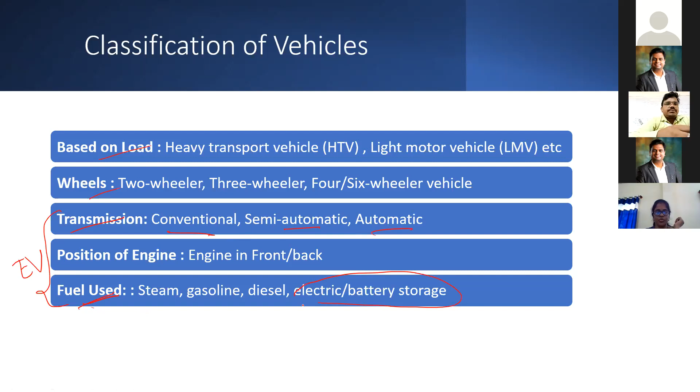These are the two things where your electric vehicles stand apart: one is the transmission, one is the fuel used. For electric vehicles, the transmission will be semi-automatic or automatic. Nowadays gearless vehicles are coming, especially in electric vehicles. And basically the fuel used in electric vehicles is electric power, the battery storage, compared to your ICE vehicles. So these are the very basic classifications of vehicles, I think everyone is very much aware of this.

Now coming to the types of EV and HEV. As I told you, what is hybrid? Hybrid is nothing but putting two sources together, which can be in the form of energy or in the form of propulsion. You can hybridize two things: one in the form of energy source, meaning you can use your fuel plus electricity as an energy source. For propulsion, you can use motors as well as an IC engine. So you can have two kinds of hybridizing.

In the hybrid electric vehicle, since you're using two different things for traction, they can be connected in the form of series, in the form of parallel, or they can be put in a complex form, that is series and parallel combined. Maybe in the later slides, I'll show you the architecture of series, parallel, and series-parallel, so it will be clear.

Then comes the second type, that is the plug-in hybrid electric vehicle. As the name says, here your battery will be charged by an external source, not charged on board. It is using a plug-in, like from sockets, from the sockets of your home, the battery is getting charged.

Then the battery electric vehicle. Here also you charge your battery, you can charge it plug-in or on board also. The propulsion system used here, from now on in the pure battery vehicles, these two are hybrid vehicles. From now on, you can have a single traction motor, that is the single traction propulsion system, which is only a motor.

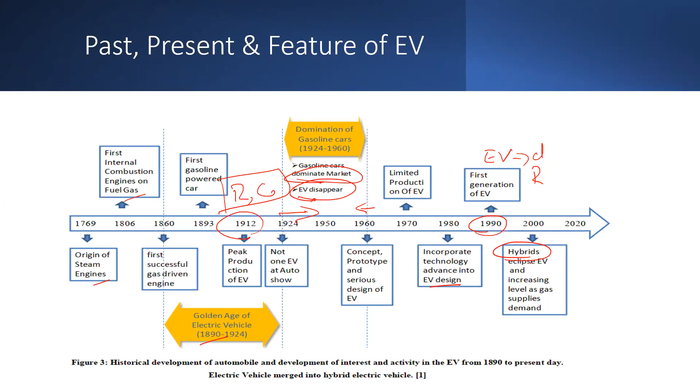The Tata Nexon is already in the Indian market, especially the electric version of the Tata Nexon motor.

This made the gas vehicles easier to start. So this is the first step which actually made the gasoline-based engine very easy to start.

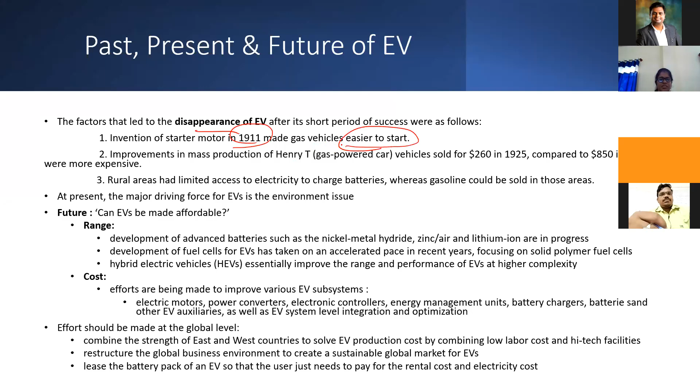The second thing is improvements in mass production of Henry T gas powered car vehicles. You see the price actually dropped from around $850 to almost a quarter of that number. The EVs were very expensive, and though the technology matured, the cost of EVs did not drop in this ratio. So this is the second reason why EVs started to disappear from the market and gasoline-based vehicles started to dominate.

The third thing, very important, is the problem of electricity to charge. We should have a proper charging infrastructure. This is one of the main hindrances to getting EVs popularized among common people. In urban areas the electrification was good, but in rural areas they had very limited access. That is why gasoline again started to make an appearance easily in rural areas.

At present, the major driving force of EV adoption is the environment issue. Many governments have zero emission policies, and this is one of the major factors why industries are again thinking back about EVs.

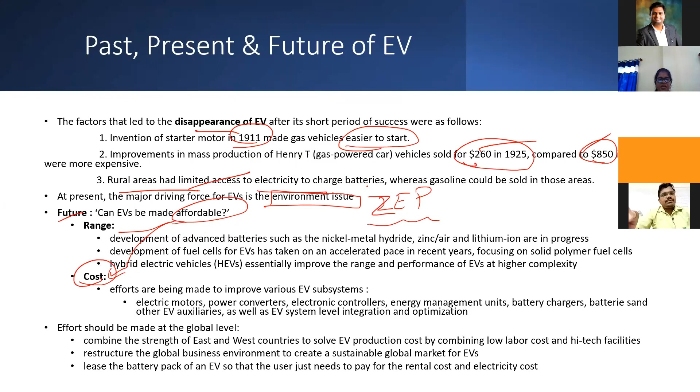The second thing is comfort - whether charging stations are available within reach. If charging stations are not available nearby, people will think that for a full charge it might take a minimum of 5 hours.

But compare this charging time to refueling tanks for ICE vehicles. People will think it's much easier because within 10 minutes you can fill up the entire tank compared to 5 hours for EV charging. These are the main hindrances why EVs are not very popular.

So what can be the solution for the range problem? We have to put a lot of development and advancement, R&D should happen in battery design, such as nickel metal hydride, zinc air, or lithium ion batteries, which are in progress. People are working to improve the range.

Development of fuel cells for EVs has taken an accelerated pace in recent years, focusing on solid polymer fuel cells. HEVs essentially improve the range and performance, but here the problem is higher technical complexity, and then comes the cost. These two things are actually driving hybrid electric vehicles.

Now, what are the solutions for higher cost? Efforts are being made to improve various EV subsystems like electric motors, power converters, electronic controllers, energy management units, and battery chargers. These are the major subsystems of EVs.

We have to work together to minimize the cost of the subsystems, so the effort has to be made at the global level. First is combining the strength of East and West countries to solve the EV production cost by combining low labor cost and high-tech facilities.

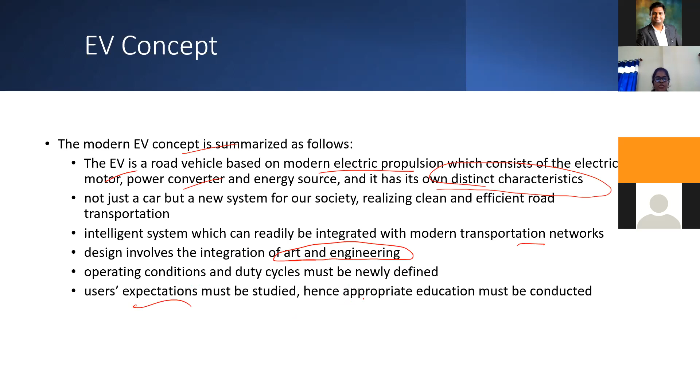Then you have to see that the users' expectations must be studied. This is very important for the automobile industries. They have to see what actually - because the end users are the ones for whom you are putting so much effort, so much money, investing so much money into your car. So it's very important to study and see what the expectations of the users are, and based on that, you have to appropriately educate the users on how to use the technology.

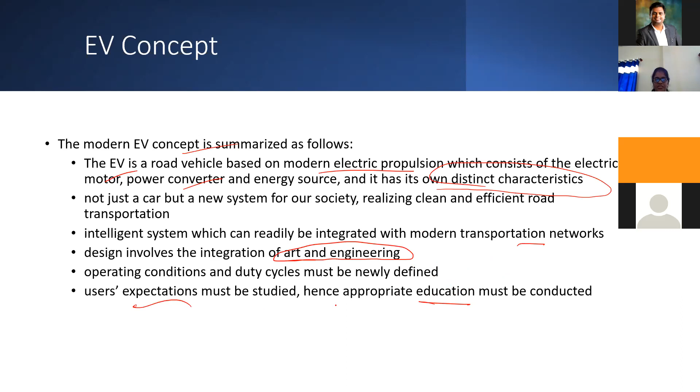Nowadays the automatic system has come, where for example the keyless entry system has come in the car. But many people are very much used to using a normal key to start the car, but now it is a start button, so you have to actually educate the people. If you just press the accelerator pedal, the acceleration will be very high, and sometimes you can bump into the road or somewhere else. So many things have to be educated, and the automobile industries actually play a very important role in this.

Now coming to the key EV technologies. As I told you, it includes electrical, electronic, information, and chemical technology. Chemical especially for your battery designs and battery management systems. First you have to integrate all these things, starting with your body design.

Initially, when the EV started to make an appearance on the road, there were two types of EVs: the conversion EV and the purpose-built EV. In the conversion EV, whatever ICE was there, you are actually converting that into an electric vehicle.

How can I convert my ICE into an electric vehicle? Just by replacing the ICE with the electric motor and the related power converter and battery. But this experiment was not successful because you have to make a lot of compromises, and a lot of losses were also happening because that vehicle was built for the ICEV. So this experiment was not very much successful.

So then people started thinking it is useless putting time and energy into this conversion EV; better to go for a purpose-built EV. The resulting conversion EV suffers from greater curb weight, a higher center of gravity, and an unbalanced weight distribution. These are the main reasons why the conversion EV is not very popular.

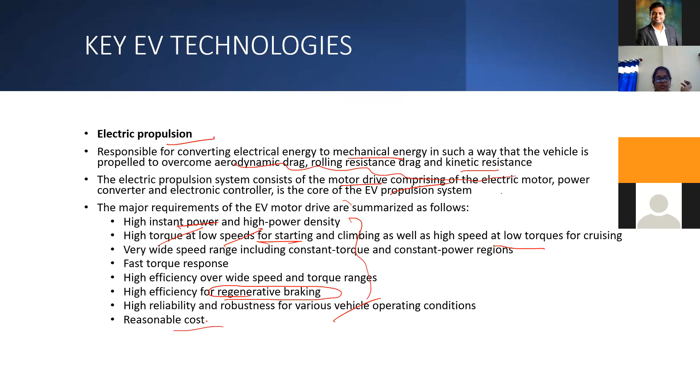Then high reliability and robustness for various vehicle operating conditions, because the vehicle can be operating in the desert, on a smooth road, or in a rural region—anywhere the vehicle can go. So the vibration and noise will be very high or low, and the temperature can be high or low. Whatever the temperature, your vehicle has to perform without any delays or lags. Then the cost has to be very reasonable. With all these features included, the cost also has to be optimized.

Then coming to the other thing, that is the energy source. As I told you, energy source is also a very important thing in the EV. So in order to commercialize the EV, one of the main obstacles is the energy source. So what are the development criteria for energy source? It can be summarized like this: it should have a very high specific energy and energy density. It means it has to give instantaneous energy or instantaneous power, plus the range has to be improved, that is, the energy density of that energy source has to be more.

Whether it can be a battery, a flywheel, or supercapacitors, anything—then high specific power and power density, then fast charging and deep discharging capabilities. So the batteries we use will have one special characteristic, that is the deep discharging capability, meaning you can deep discharge them compared to the normal batteries used for other home appliances.

Then it should have long cycle and service life. Then low self-discharging rate, as we all know a battery idle over a period of time will start discharging—a reaction will happen. Batteries should have a very low self-discharging rate and should have a very high charging efficiency.

And it has to be very safe, because if thermal runaway happens, then your battery might explode, or whenever your car collides or undergoes an accident, you have to take care that the battery should not explode. So these are the things that have to be taken care of during your crash test.

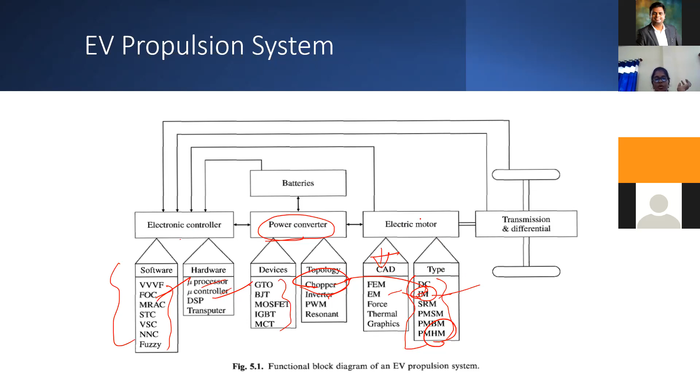So these are the different types of motors. The DC motor drive, if I use it in an EV, is actually able to achieve very high torque at lower speeds and it is very easy to control. But it needs careful maintenance because of friction, because of the presence of slip rings, that is the brushes and the commutator.

If you go for a vector controlled induction motor drive, it offers very high efficiency, high power density, efficient regenerative braking, robust, reliable, and maintenance free. But it suffers lower efficiency at light load ranges.

If I go for permanent magnet brushless motors, their high efficiency and power density are good when compared to other kinds of motors. But it suffers from the difficulty in flux weakening control for the constant power and high speed region. So in this region, the flux weakening will happen.

Then the PM hybrid motor, when you hybridize two types of motor systems, the advantage here is the auxiliary DC winding is also incorporated, so that the air gap flux is a resultant of PM flux and a field winding flux.

When I actually enter into these hybrid motors, I think I cannot cover this in detail. If you guys have any questions, please write to me or ask me at the last. These motors offer optimal efficiency over a wide speed range.

Then switched reluctance motors. Nowadays people, especially auto car manufacturers, are very much interested in this because of the simplicity and reliability in both motor construction and power converter configuration. We get a wide speed range, favorable thermal distribution, and efficient regeneration. But the problem is it suffers from torque ripples and noise problems.

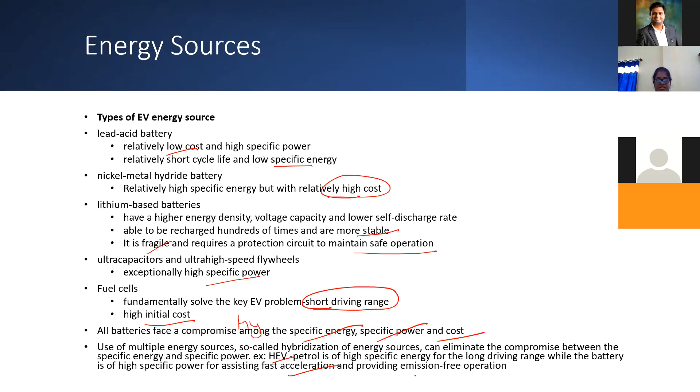So if I want to remove this compromise, hybridization comes into the picture. Use of multiple energy sources, so-called hybridization of energy sources, can eliminate the compromise between specific energy and specific power. For example, in HEV, petrol has high specific energy for a long driving range, while the battery has high specific power for assisting fast acceleration and providing emission-free operation. If I combine petrol with battery, it will also form your HEV.

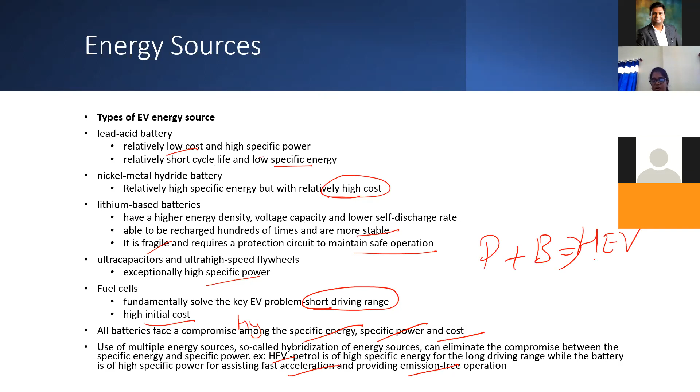So as I told you, the hybrid electric vehicles are the future. Now I'll give you a brief introduction to HEVs. Due to the limitation of available energy sources, the EV cannot offer a driving range comparable to ICEV, plus the charging time also plays a role. So if I want to overcome that, the HEV is the answer.

Using the ICE and the electric motor has been introduced as an alternative solution before the full implementation of EVs. So what is a hybrid? Hybrid, as I told in the previous slide, is a vehicle that has at least two modes of propulsion.

The possible combinations include diesel-electric, gasoline-flywheel, or flywheel-battery. Or the two power sources may be paired in series, meaning the gas engine charges the batteries of the electric system. This I'll explain in the next slides.

HEV is formed by merging components from a pure electric vehicle and a pure gasoline vehicle. The advantage of HEV is that it can extend the range up to 2 to 4 times that of a BEV alone. It can offer rapid refueling of liquid petrol or diesel, requires only little changes in the energy supply infrastructure, and is less polluting and less fuel-consuming than ordinary ICEVs.

The drawback is that since the ICE is present in the HEV, petrol is always present along with the batteries. So I cannot say it is a zero emission concept - it has to compromise on that, because some greenhouse gases will come out due to the petrol. The complexity is also very high, since you are combining two different power sources. So an HEV may be purposefully operated as an EV in a zero emission zone.

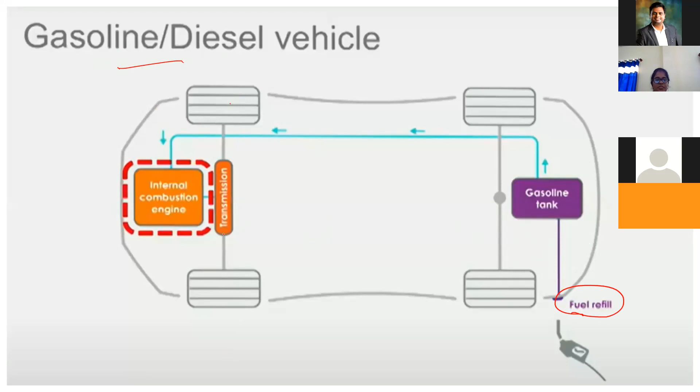Now, if I want to explain what an HEV is, first we will see the architecture of a gasoline vehicle. This is a simple architecture here. You could see this is the fuel refill, this is the fuel tank. The fuel will run into this and go to the ICE. Here the fuel will be burned, the energy will be released, and that energy will be transferred to the wheel. So this is a very simple architecture of a gasoline vehicle.

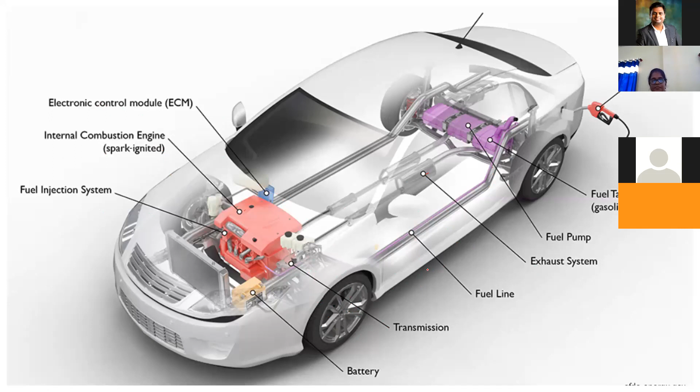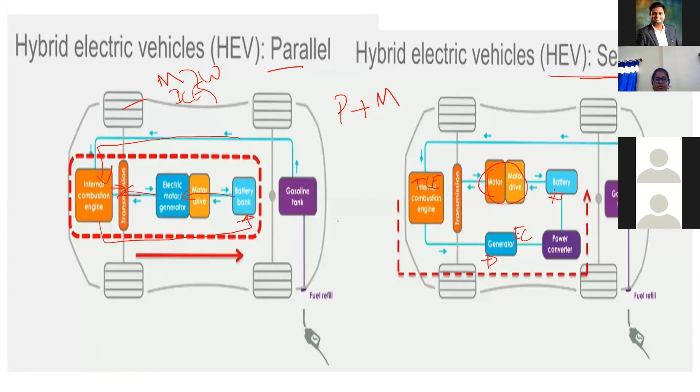I'm giving you a very simple overall architecture to help you understand, since participants are interdisciplinary. I'm giving a generalized block diagram with basic things. When you enter module by module, the complexity will increase, but to give you a basic understanding, I'm giving a simple block diagram here.

Which architecture is used will be decided by your ECU, that is the electronic controller module, which is actually controlling the entire engine as well as your motor. It will decide, since you have different modes of operation like during starting, during cruising, during switch off, during standing. During these different operating conditions, the series and parallel modes will actually switch.

For example, during starting we need high torque, so that time your wheel will be driven by the motor, because the motor gives very high torque compared to your engine. During normal cruising, it might switch off your engine and your car might run only with the motor.

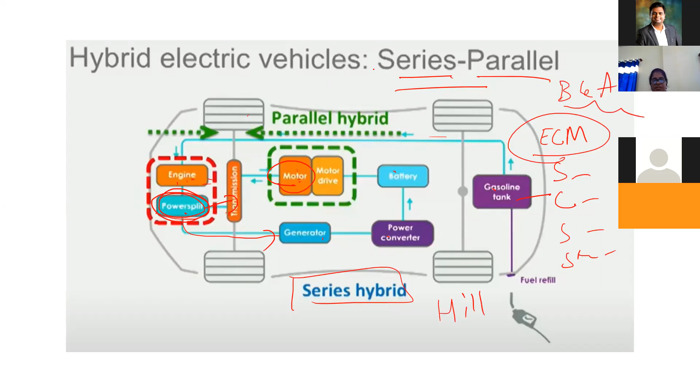When running into hilly regions, especially when driving uphill, that time your wheels will be driven both by your engine as well as your motor. This decision is taken care of by your ECM based upon the input from your brake pedal as well as your accelerator pedal. Based upon this input, your ECM will decide which architecture to follow.

So now if I want to put this into a car: this is the traction battery, the battery pack is here. This is the exhaust system, since we are having a hybrid system. This is your internal combustion engine, this is your power electronics, this DC to DC converter, and this is your thermal cooling system.

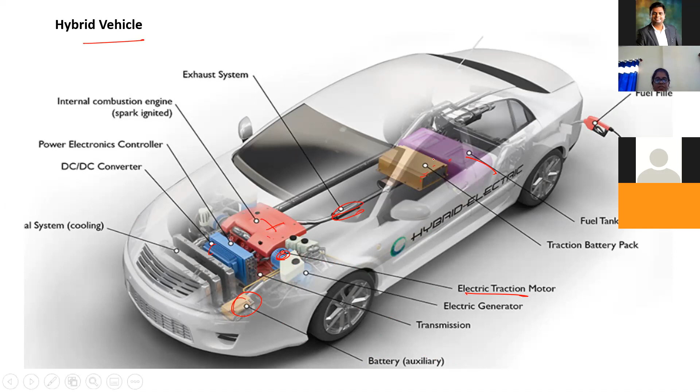You could see here your traction motor is also there. So your IC engine plus your traction motor, both are there here, and you can see the transmission. This battery is given to produce an output to run auxiliary modes. So this is how your hybrid cars or hybrid system will look like.

Now coming to your plug-in hybrid vehicle, that is PHEV. The only difference here is your battery bank is not charged from your ICE engine. It is charged by an external charging plug. The charger you will be plugging into a socket at home, actually charging your battery packs.

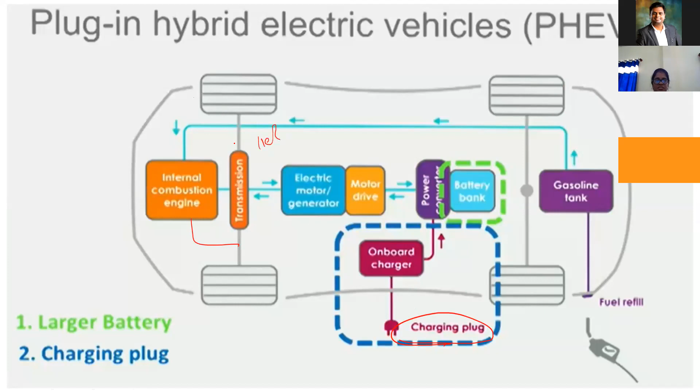But here again, because this is a kind of parallel hybrid, you can use either your electric motor or your internal combustion engine to give traction power to your wheels. So this is how your plug-in hybrid vehicle looks like. The only difference is you have an external charging unit, which will be plugged into your socket.

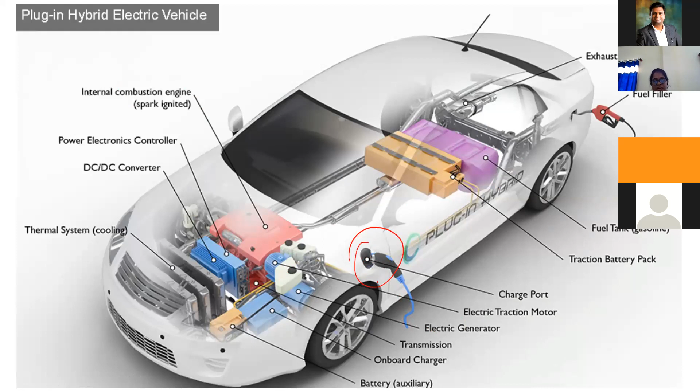Now coming to the pure battery vehicles. What is a pure battery vehicle? Here you don't have any IC, so IC is not present. You could see here, this is an onboard charger, and this is the charging plug.

You are having multiple battery banks, and you are having a power converter. That power converter allows the power to flow in bi-direction. Why? Because of regenerative braking. Because of regenerative braking, you will actually be charging from the kinetic energy from your wheels.

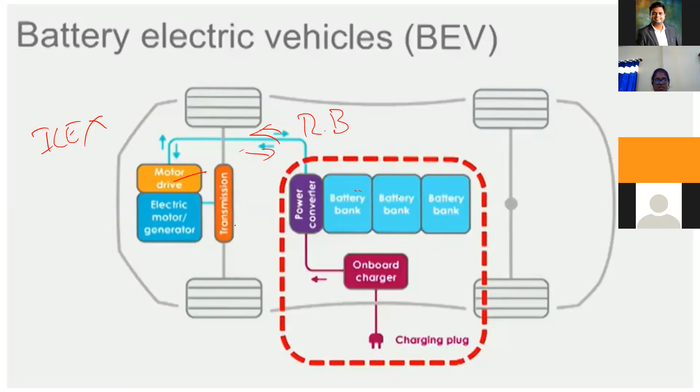So this is the motor drive, this is the electric motor or generator, and this is the transmission. This is what your BEV architecture looks like. Here you could see the battery packs are more when compared to your hybrid system. Compared to hybrid vehicles, more number of battery packs are there.

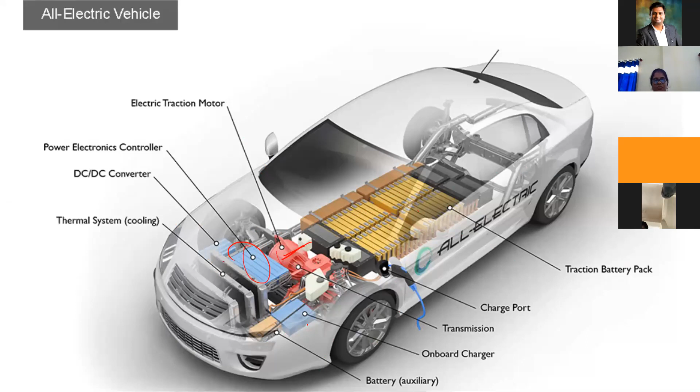Okay, so this is the traction battery pack. This is the charging port. So this is your electric traction motor. You see the motor size is also very, very high when compared to the hybrid vehicles, so the rating also will be very, very high. So you are having a converter or a power electronic portion here. This is a cooling system, this is a thermal management system. So this is the battery for providing an auxiliary, and this is the onboard charger inside your car.

So this is your fuel cell EV. Again, fuel cell EV. If you are going for compressed hydrogen, you'll be refilling the tank with the compressed hydrogen. So this is the fuel cell stack, this is the power converter.

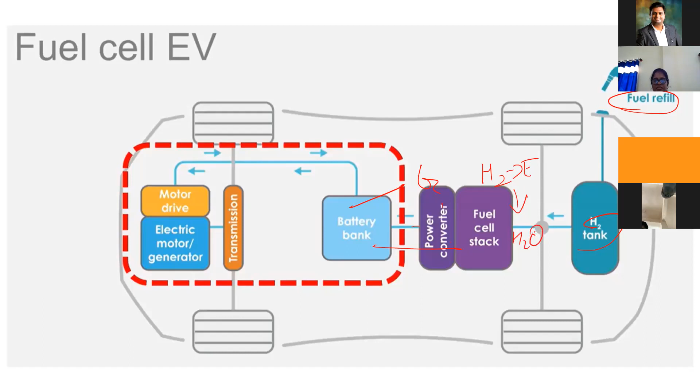Actually, here again, battery is there. Your motor is mainly driven from your battery. Here, the battery is getting charged from your power converter. Basically, you'll be having a generator, and that generator will be run by these fuel cell stacks, which will be converting your hydrogen into electric current here. But here the output will be your pure water, you will be having some output here, and that is pure water.

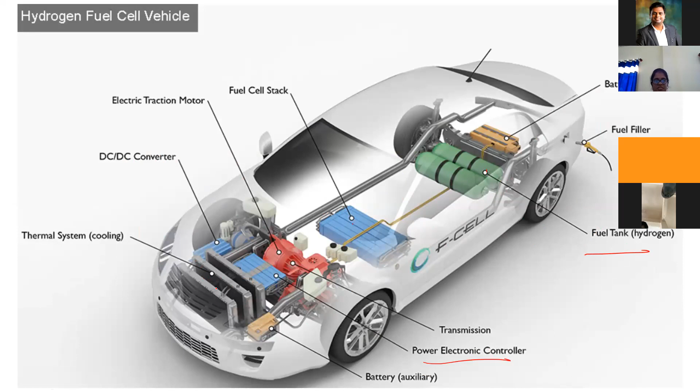So this is how it looks in the car. This is the battery pack, this is the fuel filler, this is the fuel tank, that is the compressed hydrogen tank. So this is the fuel cell stack where your hydrogen is getting converted into electrical energy. That is actually given to your power electronic controller or DC to DC converter, which is driving your traction motor. This is the thermal system. So this is how your hydrogen fuel cell vehicle will look like.

Now, if you want to compare everything on the same scale or same page, for energy source, propulsion, emissions, and different vehicle types: for gasoline, you see emissions are very, very high. The propulsion is your IC engine, and the energy source is your petrol or diesel. For hybrid electric, you're having emissions because of the presence of your petrol component and IC component, so you're having CO2, but the CO2 picture size is reduced when compared to the gasoline vehicle.

When you have a plug-in hybrid electric vehicle, since it is hybrid in nature, you're using fuel plus IC engine, but mainly we depend on the battery here. The battery is mainly used, and the IC engine is used for a very small purpose. Mainly the traction power for your car is given from your battery, so that is why the emission has reduced by half when compared to these two things.

In a pure battery electric vehicle, you have zero emission. It is only driven by the motor, and the battery pack is the main energy source. Then for fuel cell vehicles, as I told you, water is an output here, which is the byproduct of your fuel stacks. It is driven by the motor and driven by hydrogen here. So this is a comparison of different kinds of electric vehicles and hybrid electric vehicles.

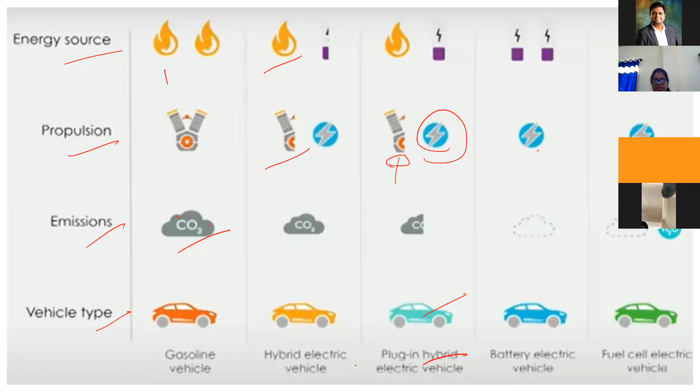Coming to the last thing, since I'm giving you the fundamentals of vehicles, vehicle safety is also very important. Automotive safety plays a very important role. It mainly depends upon criteria such as emergency care, education, vehicle engineering, road engineering, environment, then enactment and enforcement from the government. So the scientific domain related to the study, design, construction, and regulation of technology to minimize the occurrence and consequences of a road traffic accident - this is the formal definition of automotive safety.

So the infrastructure and vehicle safety both play a very important role in having a safe trip for any passengers. This will have even greater importance due to the high number of fatal injuries in road traffic accidents. Today, worldwide, there are more than 1.2 million road accident fatalities occurring annually.

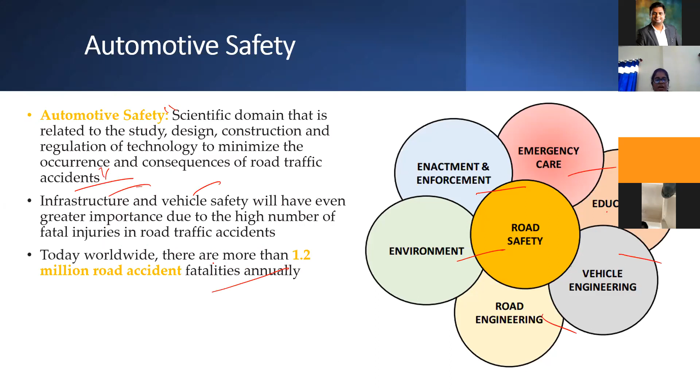So just to give you a brief overview of automotive safety, you can have two types of safety measurements: active safety measurements and passive safety measurements. The active safety measurements come mainly whenever you are having a hazard prevention mode on. You have three different things in automotive safety, that is hazard prevention, hazard mitigation, and damage reduction.

So your passive safety will come once the accident has occurred, and active safety will come before the accident. If I put an accident or crash as a baseline, your active safety components will come before this point, and passive safety components will come after the crash. So this is the timeline.

This is the testing and evaluation methods for active vehicle safety, that is eVALVE. So what are the different control systems or safety mechanisms we have? For hazard detection, you have adaptive cruise control, lane departure warning, lane keeping assist, forward collision warning, and blind spot detection. These are the different assisting systems for your driver in order to detect any hazard. Now the hazard has been detected, but still your vehicle is moving forward.

So that time your hazard avoidance will be active. That is your anti-lock braking system or electronic stability control. They will become active in order to avoid the hazard. Now the crash is unavoidable.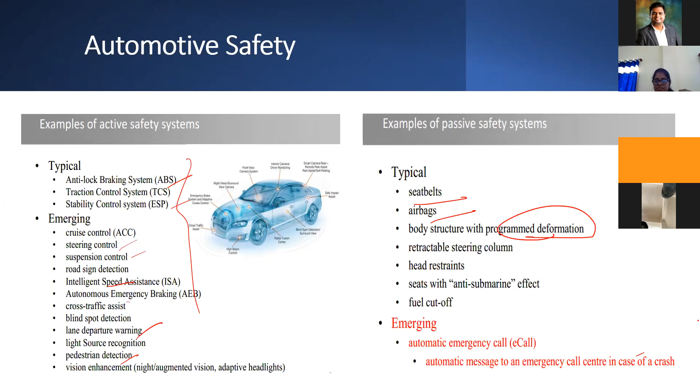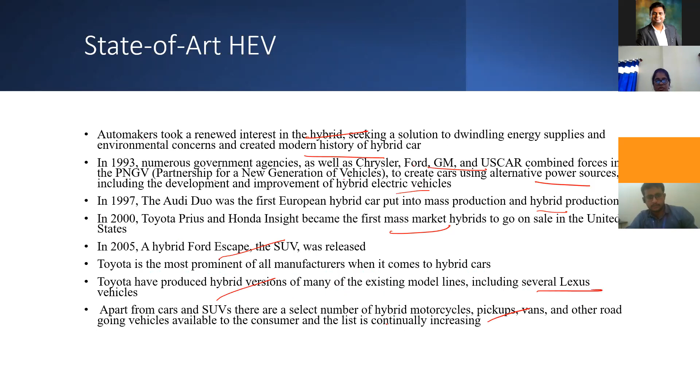Toyota is the most prominent of all manufacturers when it comes to hybrid cars, having a large number of hybrid versions, especially in several Lexus vehicles. Apart from SUVs, other vehicles like normal pickups, vans, and other road vehicles are also going hybrid. Simple examples are the Nissan Leaf, Honda Clarity Electric, Audi e-tron, or Porsche Taycan for electric, and Honda Insight, Toyota Corolla hybrid, Ford Fusion hybrid, or Hyundai Sonata hybrid for commercially available hybrid vehicles.